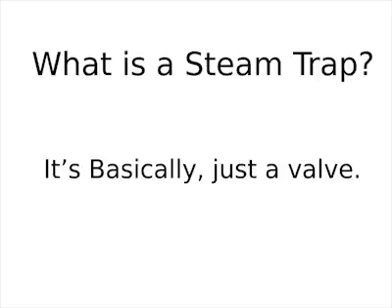Now, there's many different types of steam traps, and each one of them is designed to work with specific processes. Some are considered float-type traps. They work on a similar principle as your toilet. Like when the float is down, because the water reservoir is empty, and as the float rises up, as the water reservoir fills, it reaches a certain point and it closes the valve to stop the water flow.

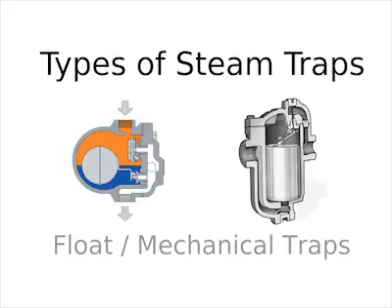In a float steam trap, the float moves as condensate and contaminants collect in the reservoir, and then when there's enough condensate accumulated, the float triggers the valve to open up and purge, and that keeps your steam system pure. Another type of steam trap is known as a thermodynamic type.

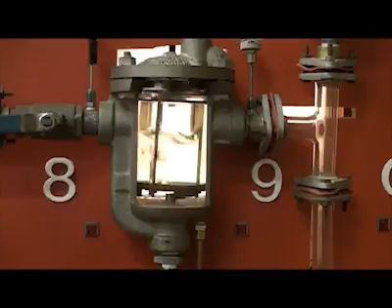Now, thermodynamic traps work on the principle of differential temperature between pure steam and condensate. They have a little metal disc, and that disc moves as condensate collects and the disc cools down. And when the disc reaches an engineered temperature, it moves just enough for a valve to open up and then purge the trap. When steam comes back in, it heats the disc back up, and then that closes the valve again. So you can see there's different ways of opening and closing the valve, but they're basically all doing the same thing, opening and closing to get rid of condensate and gases.

It's kind of strange. A lot of people confuse steam and condensate. Steam is an invisible gas. That's right, steam's invisible. If you can see it, then it's not steam anymore. It's condensate. The thing about steam is it takes a lot of energy to turn water into steam. The last time I checked, energy costs money. So steam, like any other process gas you may use, has to be considered a resource. Steam is a paid-for asset, and as such, it's an investment that needs to be protected.

Let me give you an example. Let's take 1 pound of water at room temperature, 70 degrees Fahrenheit, and let's add 142 BTUs of heat energy to that 1 pound of 70-degree water. Now I'm going to have 1 pound of water, but by adding that heat energy, I've brought it up to 212 degrees Fahrenheit, or 100 degrees C, the boiling point of water. But it's still not steam. It's just really, really, really hot water.

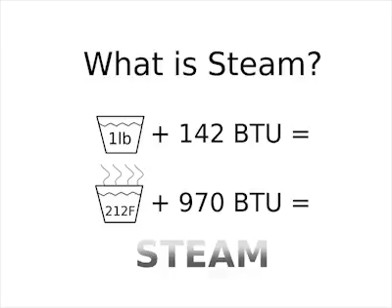To turn that 1 pound of water at the boiling point into steam, I now need to add an additional 970 BTUs of energy. And then I can turn that 1 pound of boiling water into actual steam. Now, if I've expended the energy to convert room temperature water to steam, I want to do everything in my power to keep it steam. Enter the steam trap, these low IQ valves. They play an important role in keeping steam systems free of water and contaminants. Properly working steam traps protect our investment in steam.

So, how can we be sure our steam traps are up to the task? The consensus method for testing steam traps is to use 3 senses. We're going to look, we're going to listen, and we're going to feel. Visual inspections can alert us to things that don't appear right. For example, if you see water pooling on the ground or condensate vapor shooting into the air, those can indicate some kind of an external leak.

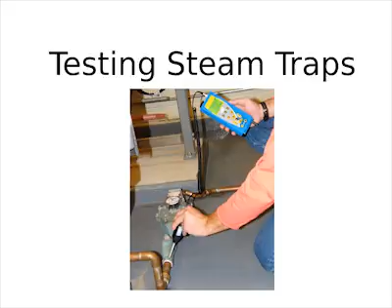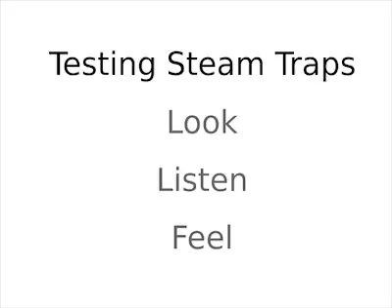Listening with a quality ultrasound instrument gives us an idea of what's happening inside the steam trap. And while we're going to insist that you never actually place your bare hand on a steam trap to feel it, taking its temperature with a non-contact spot radiometer is a great way to confirm your ultrasonic inspection, and even to confirm that the steam trap's working in the first place.

So ultrasound equipment offers a static decibel measurement from the steam trap with the signal heterodyned so that you can hear the converted ultrasound signal in the headphones. This allows inspection of steam traps in high noise environments, and it lets you actually listen to what's going on inside the steam trap. Advancements in ultrasound detectors by SDT include a spot radiometer for temperature measurements, as well as dynamic signal recording. So we're taking those visual and touch senses and we're enhancing them.

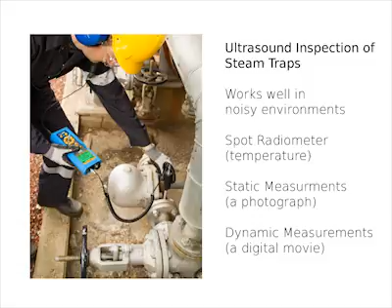For instance, the steam trap could be undersized for the application. Well, that's an engineering problem, or is it? I mean, there could be other steam traps in the system that have failed. So because those other steam traps have failed, now this steam trap is working double time to take care of the ones that have failed. So that's causing this steam trap to be overloaded. So now it's undersized. There could just be a mechanical fault with the trap too.

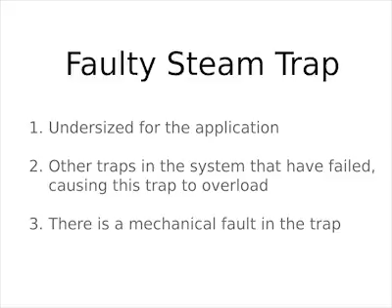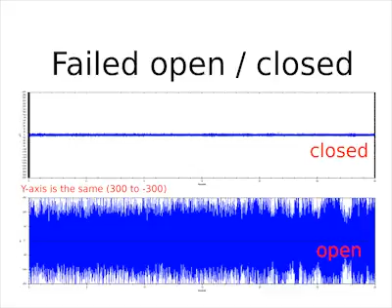Compare that with a trap that's failed open. It looks real similar, just a sea of blue noise, but look at the y-axis. It's showing much higher signal. So that's indicating that it's wide open and that there's a lot of turbulent flow across the valve. This is what most inspectors want to find. They want to find steam traps that are throwing good money steam directly into their condensate system so that they can get those steam traps identified, replaced, and restore their entire steam system to the efficiency that it was originally designed for.

Many steam system inspectors rely on temperature only to determine if a steam trap has a problem, but sometimes this can be misleading. To determine if a trap is working at all, we want to determine if steam is getting to the trap, or if there's a blockage somewhere. If the trap is closed and plugged, water can build up in the system, and the trap won't be as hot as it should be. I've never been near a steam system and not been able to find a pressure gauge. And since I know there's a consistent relationship between temperature and pressure, it's relatively easy to estimate the expected temperature of a trap if you know the pressure.

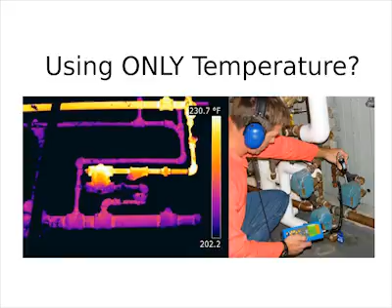For example, a steam trap under 5 bars of pressure is going to have a temperature of around 250 degrees Fahrenheit. As a rule of thumb, there's a heat loss of 10% across the pipe. If the steam system is 5 bars, it should be around 250 degrees Fahrenheit, less about 10% for heat loss. So using my SDT 270 in the temperature mode, I would expect to measure 225 degrees Fahrenheit on the outside of the trap. If it's lower than 225, then I know there's either a problem or that part of the steam system is not in service.

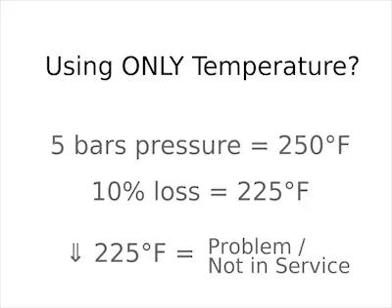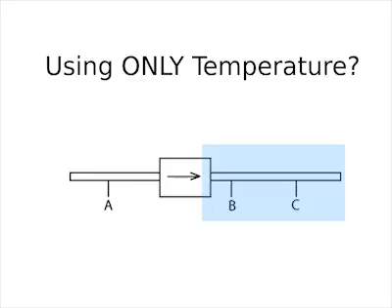Conversely, if the trap is hotter than I expect, then I'm going to go to the downstream side of the trap and listen with contact ultrasound. I expect to hear nothing. If it's hot at the trap and quiet downstream, then likely the trap is working just fine. But you can't rely on temperature alone. Sure, taking a temperature measurement downstream and upstream, we should expect some differential, and this will be the case most of the time, but there could be back pressure existing in the system.

Here's an example from an ultrasound inspector at a New York City hospital. He was following the correct procedure. He compared the upstream temperature to the downstream temperature, and he discovered that the downstream side was hotter. This is the opposite of what he expected, and it's also the opposite of what we trained him to expect.

The upstream side of the trap was 110 degrees Celsius, and excuse me for switching from Fahrenheit to centigrade, but this is the example we've got. And the static ultrasound measurement recorded 5 decibels of ultrasound on the upstream side. The downstream was much hotter and louder, with a measurement of 15 decibels.

So we tried to decode the problem, and we took additional temperature and ultrasound measurements going further downstream from the trap. Sort of like the ABC method. So A being the first measurement upstream, B being the first measurement downstream, and then C being additional measurements taken further and further and further downstream of the trap. The further we went, the louder it became ultrasonically, and the temperature was hotter too. So the trend continued until we reached a header.

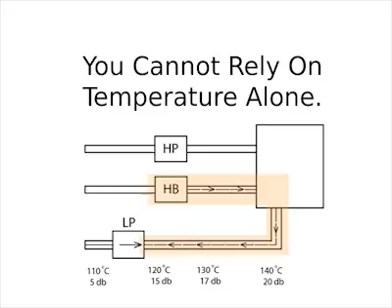And that explained both the increase in temperature at that trap, and it also explained the ultrasound being louder on the downstream side of the trap. This high-pressure failed trap was feeding live steam and ultrasonic turbulence directly into the condensate removal system.

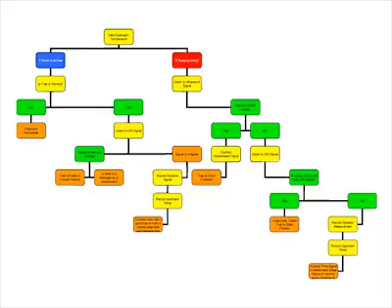So if you've never tested a steam trap before, or you're just getting into testing steam traps and you're not exactly sure where to begin, SDT's put together a steam trap decision tree. And here's what it looks like. And it looks like a lot if you look at it all at once, but if you break it up into the tiny bits that make it up, then it actually has a rather logical workflow to it. And here's how you would use it to determine the condition of a steam trap.

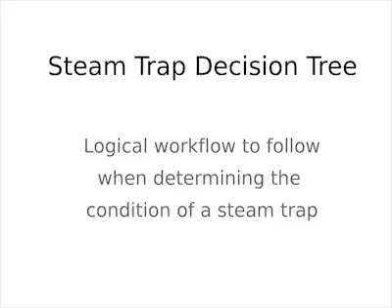The first thing you need to do is establish if the trap is working or not. And that means, is it online? So start by finding out the operating pressure of the steam system. And since there's a direct correlation to pressure and temperature, knowing the pressure makes it easy to estimate what the expected temperature of the steam trap should be. Remember to subtract the 10% to compensate for heat loss across the piping.

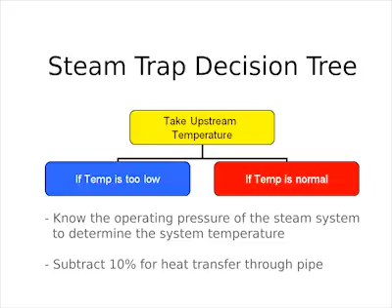So if the temperature is lower than you expected, then confirm that the trap is in service. Maybe it's not even in service. And if it's not in service for whatever reason, then you're done. I mean, you can't evaluate faults on a steam trap if it's not in service. So on to the next.

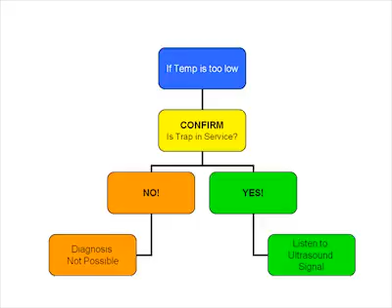If the temperature is too low and the trap is in service, then listen to it and measure its ultrasound signal. If the signal is low and constant, the trap is either failed in a closed position or there's a blockage up or downstream. If the ultrasound signal is irregular, take a recording of its dynamic signal and then view it in the time domain. Also record the upstream temperature. At this point, it may be useful also to compare data with a known good steam trap to build a reliable diagnosis and get some baseline data.

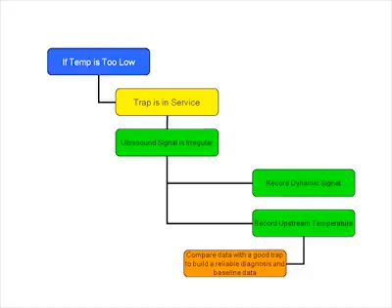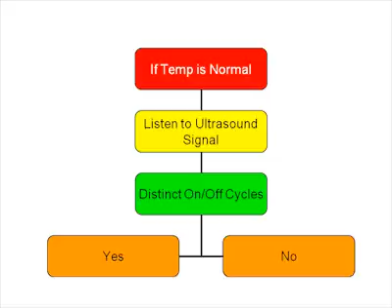If the temperature is normal, then listen to the ultrasound signal. As we discussed earlier, a good steam trap will have distinct opening, closing cycles, and these cycles should be spaced apart anywhere from 10 to 60 seconds, depending on the process, depending on the system. If the cycles are normal, confirm the downstream temperature is lower than the upstream temperature and conclude that the trap is working.

Should the cycles be questionable or non-existent, identify if there's a distinct rushing sound and if the downstream ultrasound signal is high. If yes, the likely diagnosis is a large passing leak from the trap being failed in the open position. If not, record a dynamic signal and display it in the time domain. Record the upstream temperature and perform diagnosis, and then determine early failure mode or good condition.

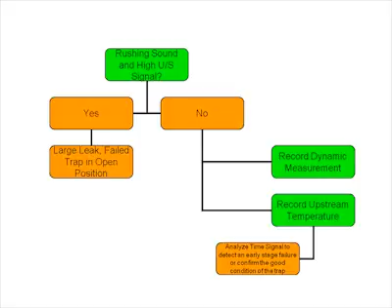Look, there's tremendous opportunities for energy savings from a diligent steam trap survey program, but we need to treat steam as we would any other process gas. Steam represents an investment in energy. A properly engineered steam system should have sufficient condensate removal apparatus in place to protect that investment. As these apparatus age, they lose their efficiency and their ability to keep steam pure.

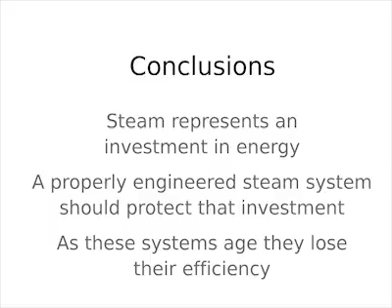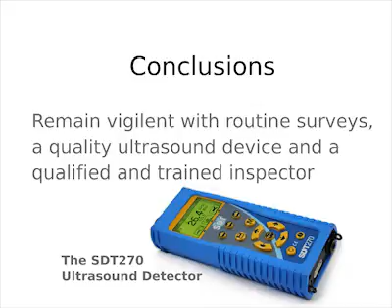Remaining vigilant requires routine surveys with a quality ultrasound device such as the SDT 270 Steam Surveyor's Kit and a qualified and trained inspector. Stop wasting steam and adversely affecting your product quality and renew your steam system's efficiency. The first step is to implement an ultrasound testing program today.